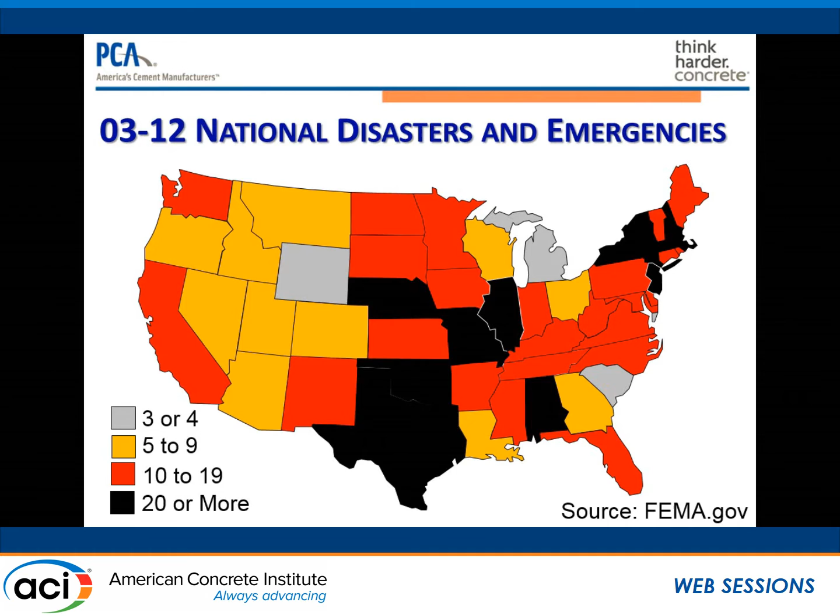No place in the United States is excluded from disasters. This is over a decade, and every state has had at least 3 nationally declared disasters or emergencies. This doesn't count the ones that the governor declares. These are the nationally declared ones. So there's a lot of disasters that occur. There's something that should be addressed better in virtually every part of the United States. And let's see what's going on here.

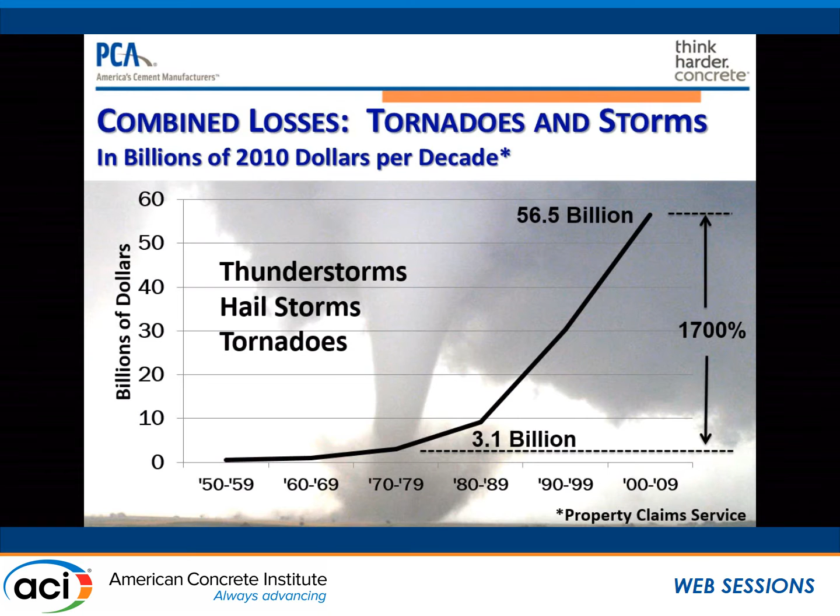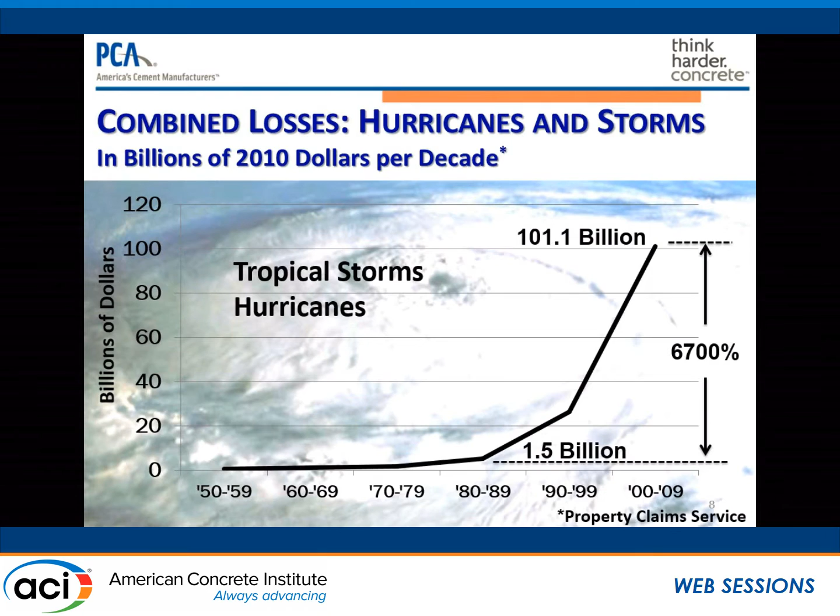Thunderstorms, straight-line winds, and tornadoes: from the 1970s to 2010, which is the last year I have full decade data for, a 1,700% increase in property losses. This is huge. Tropical storms and hurricanes, 6,700% increase in property losses. Something is clearly going awry. Winter weather events, an 1,800% increase in property losses.

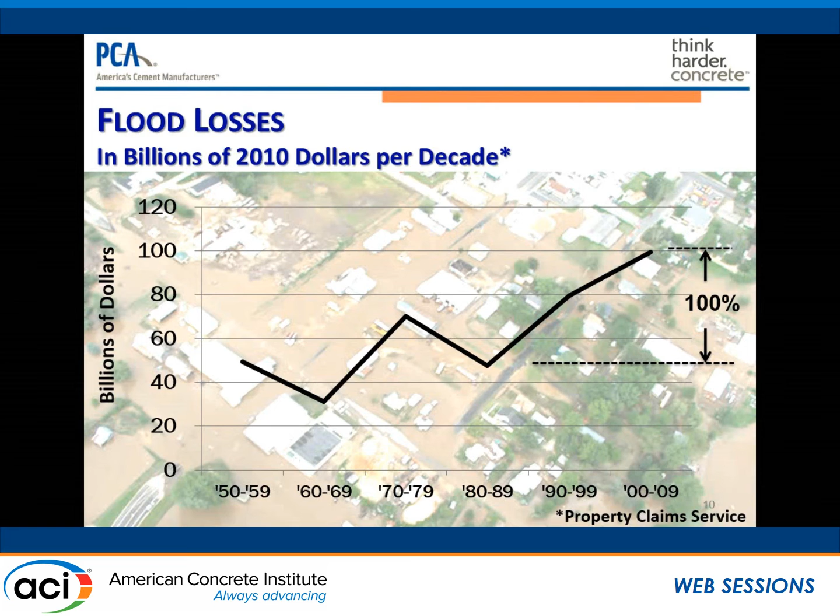Floods are not reported aggregately. The flood data comes from FEMA, where the other data comes from the Weather Service. So it's by event. But the amount of flood loss claims has increased by 100%. And these are all in 2010 dollars. So this isn't just because it cost less back then. It's all brought up to 2010 dollars. And in fire losses, an 85% increase per fire.

First thing people say, well, we're having more severe weather. There are worse events. Well, if you look at the statistics from the National Weather Service, the EF3 to EF5 tornadoes, they're not increasing. That's the number of EF3s and EF5s per decade, and these are the property losses due to tornadoes, straight-line winds, and thunderstorms. So something else might be awry.

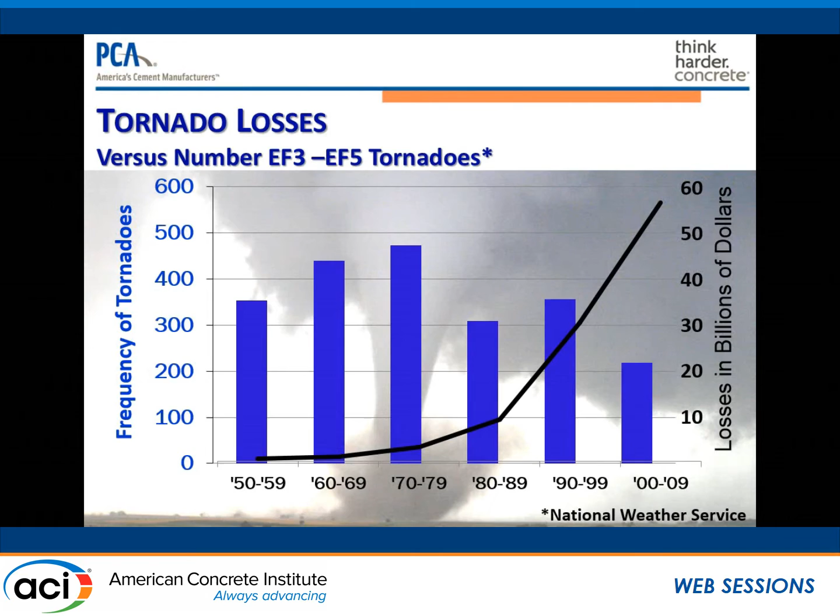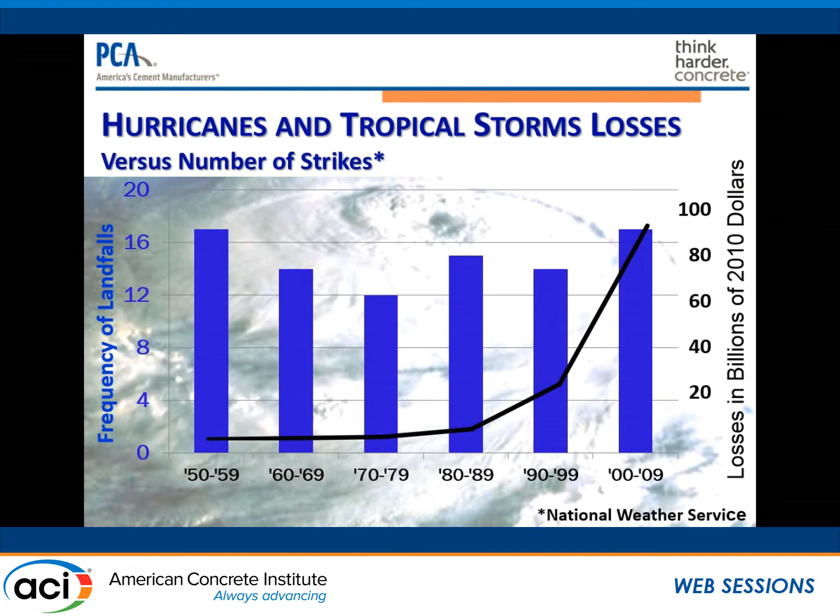Hurricanes and tropical storms making landfall. That's relatively flat. This is not. So it's not the frequency of events. Most people presume it is the frequency of events. Well, we're just getting more of them. No, we're not getting more of them.

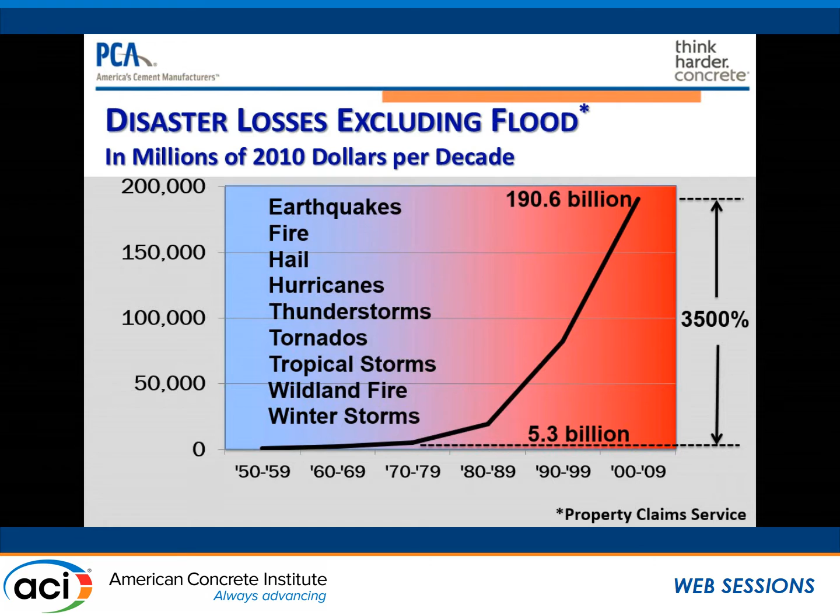When we combine them all, I don't have flood in here because, again, FEMA doesn't report the aggregate flood losses. But overall, it's a 3,500% increase for all disasters, going from the end of the 70s at $5.3 billion 2010 dollars to $190 billion 2010 dollars in 2010. This is all based on the historic data.

We do hear from NOAA and NASA. Their climate change models predict that there will be more severe weather. So if this is what's happening when we don't yet have the more severe weather, can you imagine where we're going to end up when we have more droughts and more wildland fires, we have sea level rises and more flooding, more storm surges reaching further inland, and we're not prepared.

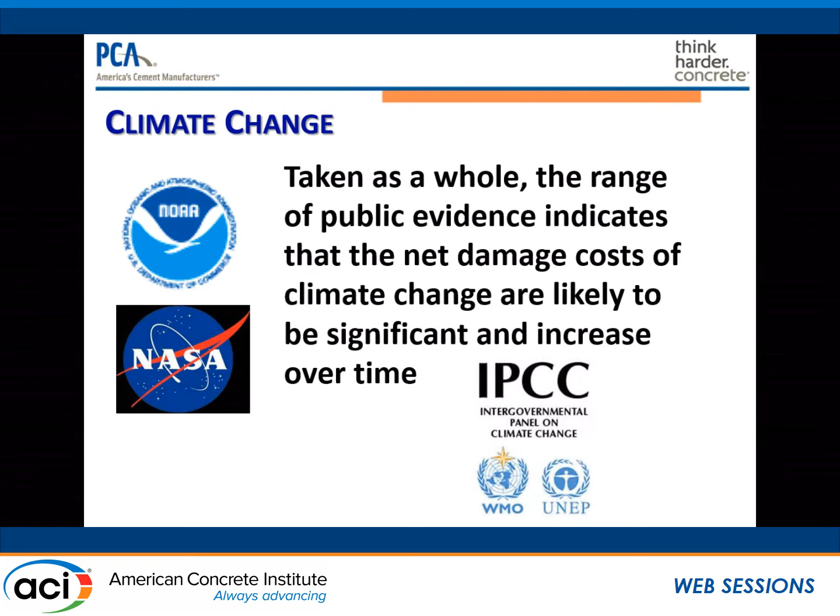Buildings are built for a 75 to 100-year life, and we're basing it on what used to happen. We're not even looking forward to what's going to happen with climate change when we're designing buildings.

This is from the February edition of National Geographic. They took a middle of the road. They didn't take the highest sea level projections. They didn't take the lowest sea level projections. They took a 5-foot sea level rise by 2100.

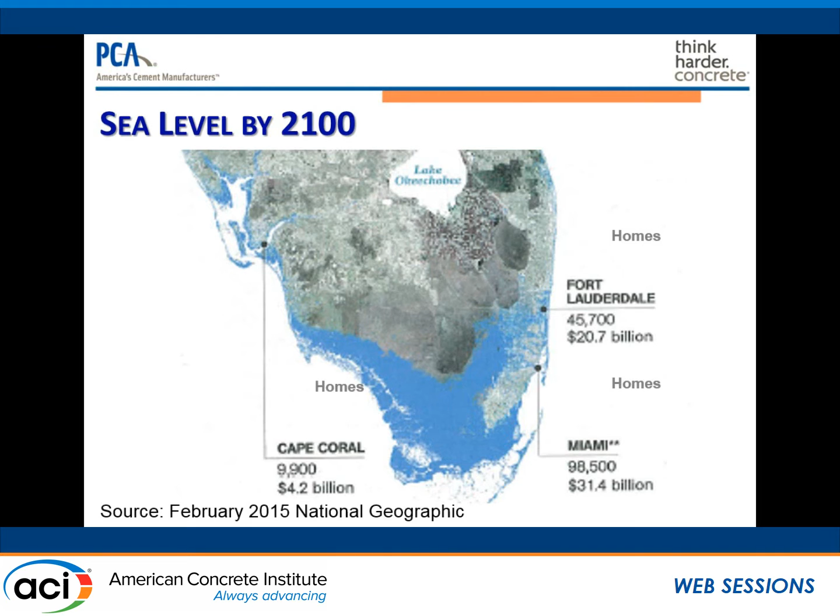This is Miami. Nearly 100,000 homes will be underwater. And we're still building the new homes in Miami today without anticipating that this is going to be a 5-foot increase in sea level. So we need to start thinking about doing things differently. So what is it that is potentially happening here that's causing these huge increases in property losses?

Well, the next thing I hear from everybody is it's demographics. It's the population shift. People are moving and living in more disaster-prone areas. Well, the Census Bureau data does not suggest that. It's an influencer. It has an impact. But clearly, these regional shifts in population aren't matching the slope of this curve of losses. So it's not population shift either.

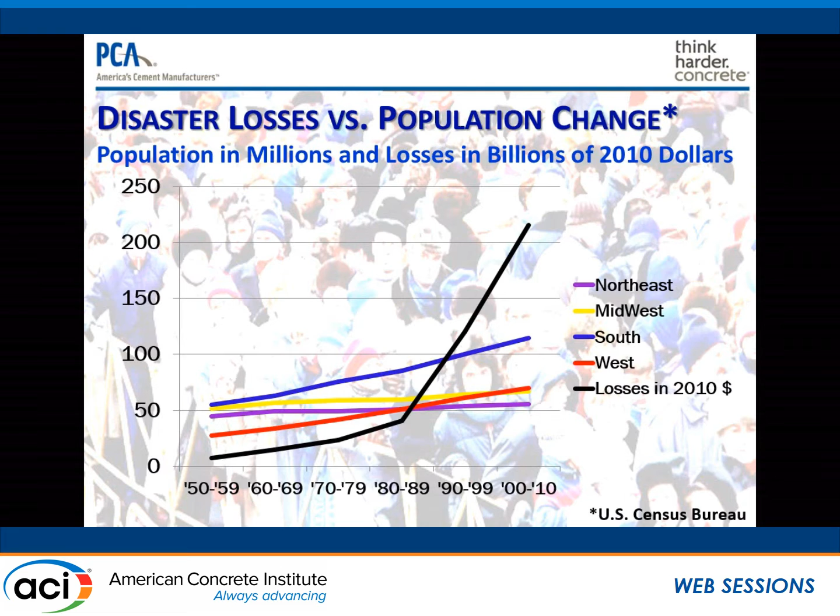And as places become more populated, property values go up. When property values go up, we replace those low-rise buildings with high-rise buildings. As soon as we get the high-rise buildings, they're built to a higher standard than the low-rise buildings. These types of structures typically will withstand any kind of storm surge or wind events that are going to happen. They might get some superficial damage to them depending on the cladding system selected, but for the most part, the mid and high-rise buildings perform very, very well.

So as the population moves to these areas, property values go up. You want to increase the population density. So as you increase the population density, you get high-rise buildings, and people are safer in the high-rise building. But all these people who are in these surrounding areas with these low-rise constructions are still vulnerable. So the population shift, even if it is a factor, is probably offset by what we do when people move to these more disaster-prone areas.

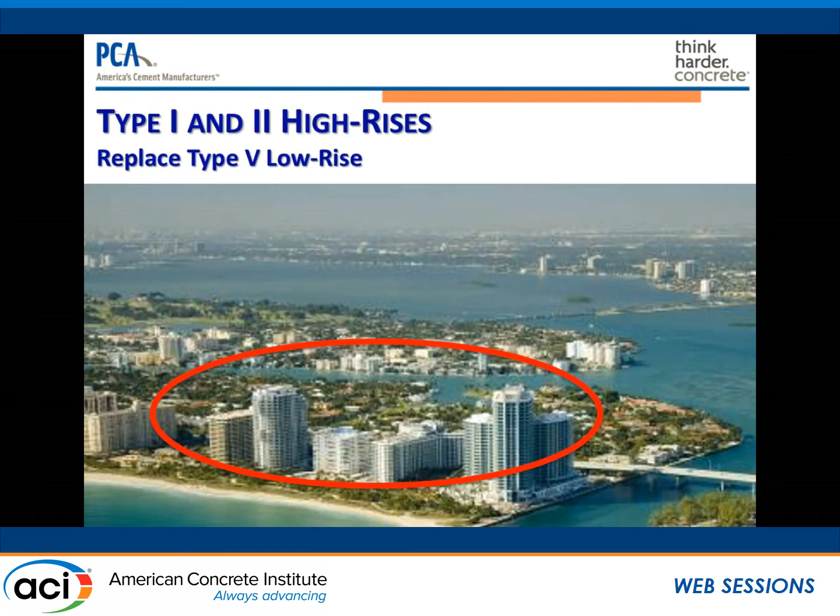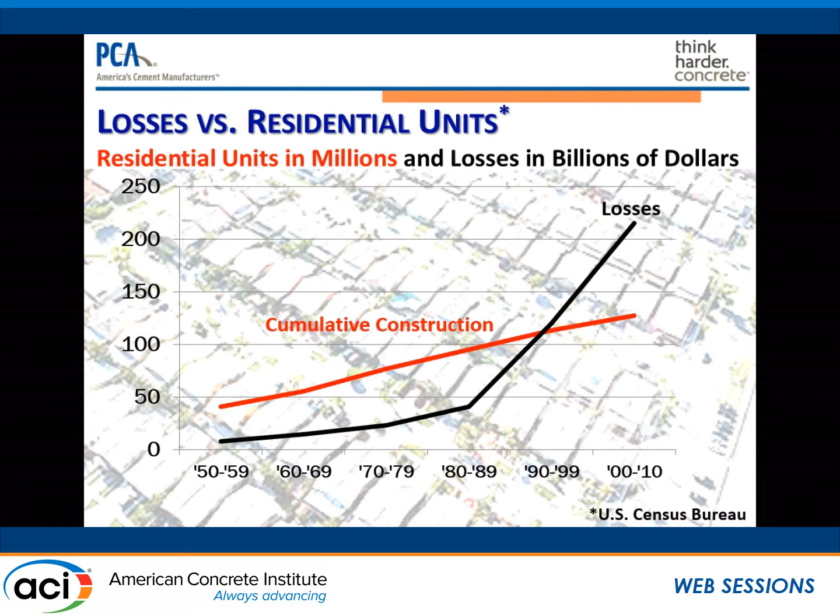It's clearly not the construction put in place. This is cumulative construction put in place for a number of residential units. It's pretty much a flat line from year to year. It's the same number of housing starts. But again, even when we looked at the cumulative number, it doesn't match the increases in property losses. So if it's not the frequency of events, it's not population redistribution, and it's not the amount of construction, that to me indicates that it's all tied to our societal trends.

In the 1960s is when the business model of least initial cost, maximum return on investment, started to become adopted as the business model for almost every corporation in the United States. There were several efforts to try to counter that. You might recall that we went through in the 1990s total quality management, and prior to that we had W. Edwards Deming and his work trying to increase value, but they weren't enough to stop this shift to drive everything to least initial cost. So what we have seen over time is changes in construction practice to meet this business model.

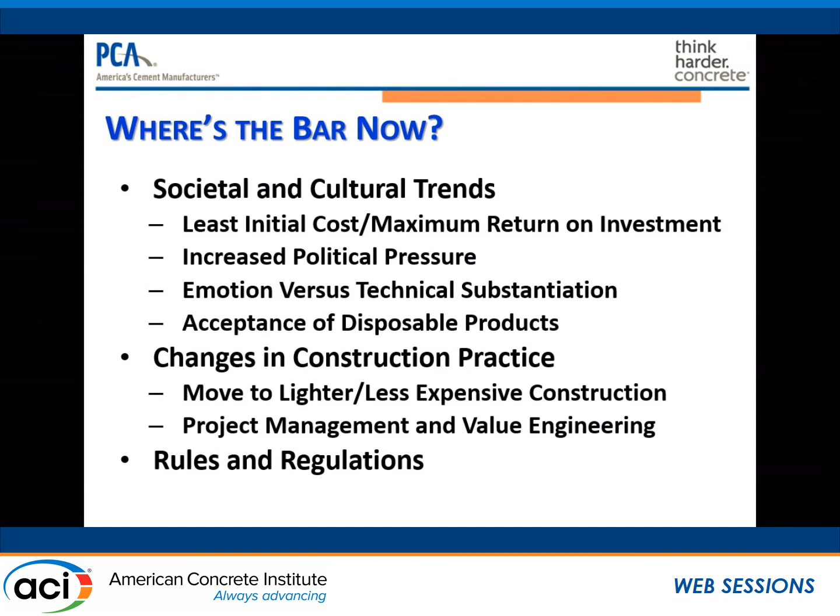This isn't about business people trying to do something intentionally wrong to increase the vulnerabilities of people, but it was just to stay alive in business. If you want to stay competitive, if everybody else is going least initial cost of investment, you need to follow that model to stay alive. You don't get a whole lot of options. This whole maximum return on investment, well documented by Dr. Michael Lepech from Stanford University, has really started to drive the increase in vulnerabilities.

One of the best ones to look at for residential construction is in the 1960s, you used structural plywood on the outside of a 2x4 wall. In the 1970s, oriented strand board demonstrated to be comparable to structural plywood, so it was also accepted into the code. Today, this is 3/16 of rigid foam insulation on the outside of the wall.

So for most homes that are built today, you have a 1/2 inch of gypsum wallboard on the inside, 2x4 studs with batt insulation in between, 3/16 inch of foam board on the outside, and then vinyl siding over the top of that. With a box cutter, you could probably go through the wall easier than breaking down the door. We are no longer building resilient homes.

There was a paper at the Structural Engineering Conference two years ago where in Missouri, there was a group of people who moved here from Florida, and they built their homes here in Missouri when they moved here, the same as they used to build them in Florida. Now, this goes back to plank construction, so that's what they were using when they got here, because they just knew that's just how you built homes.

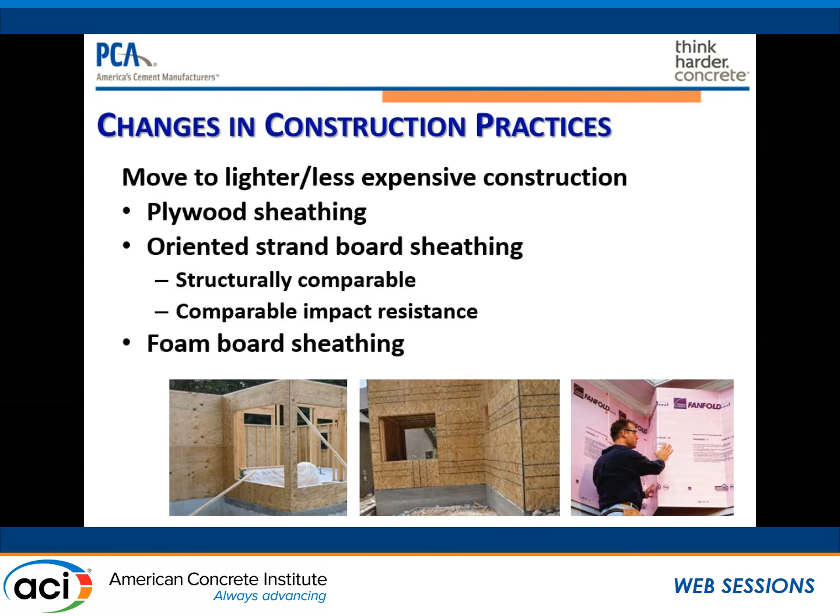They happened to come from a hurricane-prone area, and they used diagonal planking for walls and floors. And when the tornado hit their town, they didn't know how to do the attachments to the foundation for the tornadoes, but it just picked up all these homes and just moved them off their foundations. It just picked them up, put them back down. They were still intact.

There has been a dramatic change in the way things are being built. Part of this is because of government deregulation. This compounded the effort. Prior to the 1980s, most builders did not build to the local building code. They exceeded the building code because they didn't want to lose persons who could qualify for VA, HUD, Federal Housing Administration, Farmers Home Administration mortgage packages.

So they built to these HUD criteria, or the Farmers Home criteria, or some other government regulation. Well, these documents were designed so that the buildings would last for 30 years, or that was their intent, because they were insuring a 30-year mortgage on them. Well, in the 1980s, when we deregulated the federal government, these just simply disappeared. So it's left to the local building code. And in many jurisdictions, we don't even have a building code, at least a residential building code. So it created some more concerns.

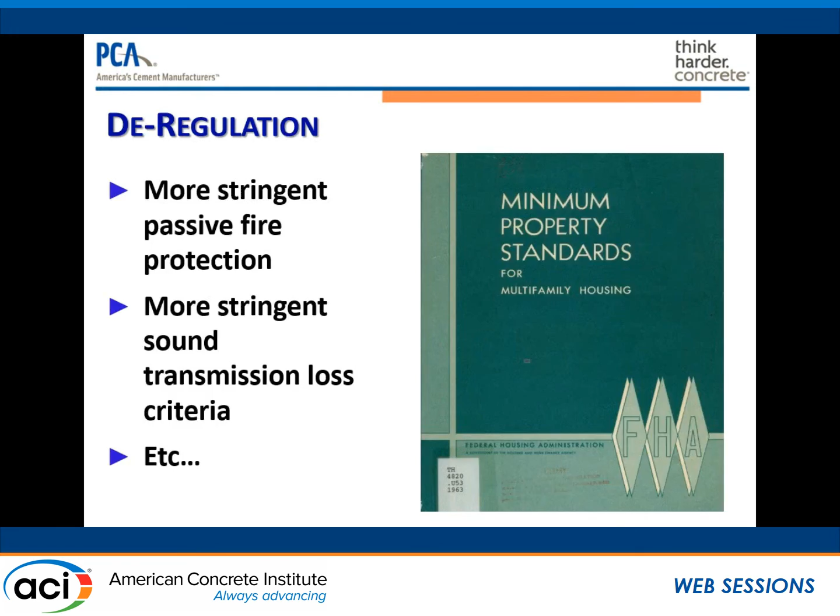How do you get to least initial cost of investment? You build to minimum code. So what are we providing? A safe structure? A structure that reduces vulnerabilities? I don't think so. Minimum code doesn't imply anything about property protection. Minimum code is the worst building that can be legally permitted to be occupied. Things are spiraling sort of out of control. So what can we do?

Well, this has become a major issue for communities. Communities are trying to figure out how to become more resilient. They know Moore, Oklahoma can't continue to take these tornado hits. Coastal Florida can't continue to try to rebuild after these hurricanes come in and leave scoured slabs behind. What is happening? This has really been elevated.

It's a national priority. There's presidential policy directives, there's presidential executive orders. There's an effort by the National Institute of Standards and Technology to set up a national framework for resiliency, and a significant component of that will be building codes and standards. FEMA has launched Resilience Star as a pilot program. So this is getting awareness. This is increasing in awareness.

I participated in a program to educate staffers working on a bill for enhanced resiliency on December 2nd. I had to yield my time slot to Congressman Daniel Webster, because when the congressman shows up to talk to the staffers, everybody else just goes and sits down. And his comment was, buildings should not fall down after a hurricane or any other disaster. Cool. They then invited me up to talk, and I just said what he said. I mean, this is what we should be doing.

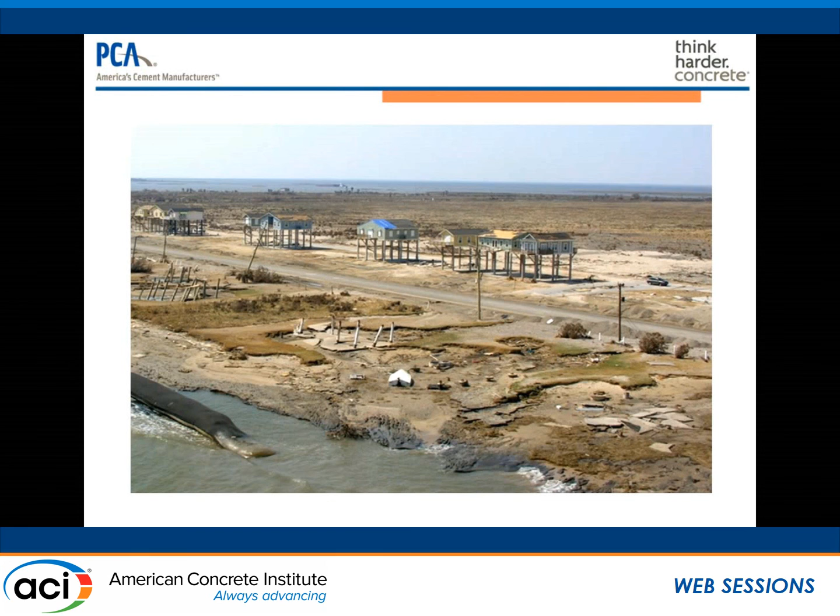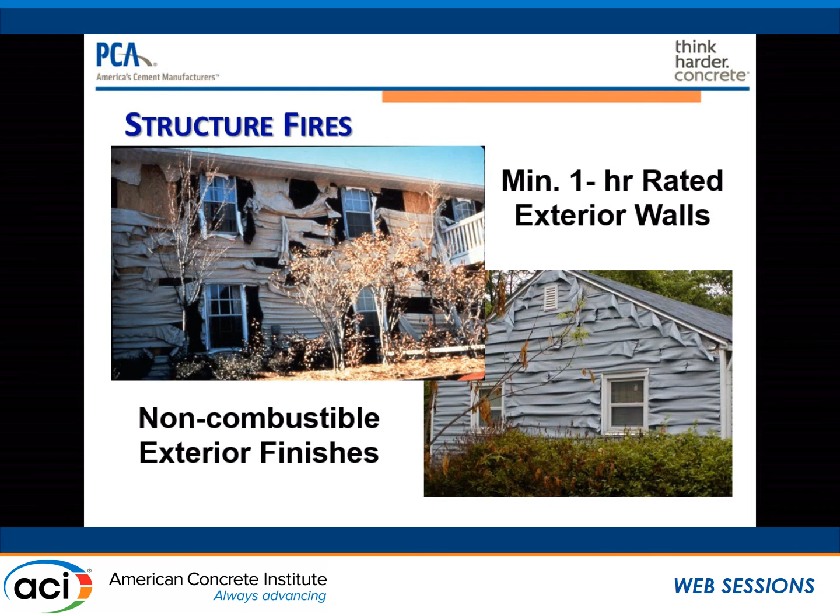We should get this right because our society can't continue to support the aftermath of these events. Adding to the code modifications, 1 hour fire rated walls instead of this. This wasn't the building that had the fire. This is 150 feet away from the building that had the fire. This is just from low E glass on the neighbor's building, melting the vinyl on the other side.

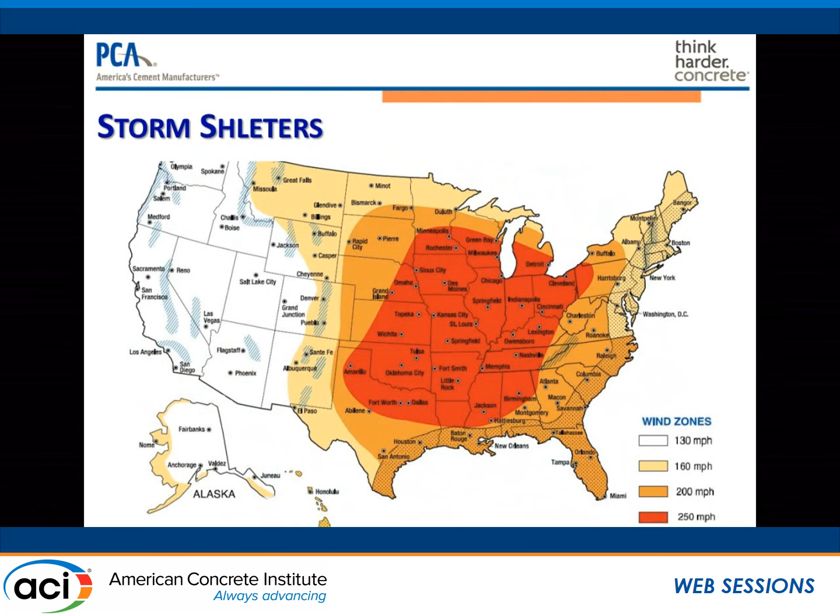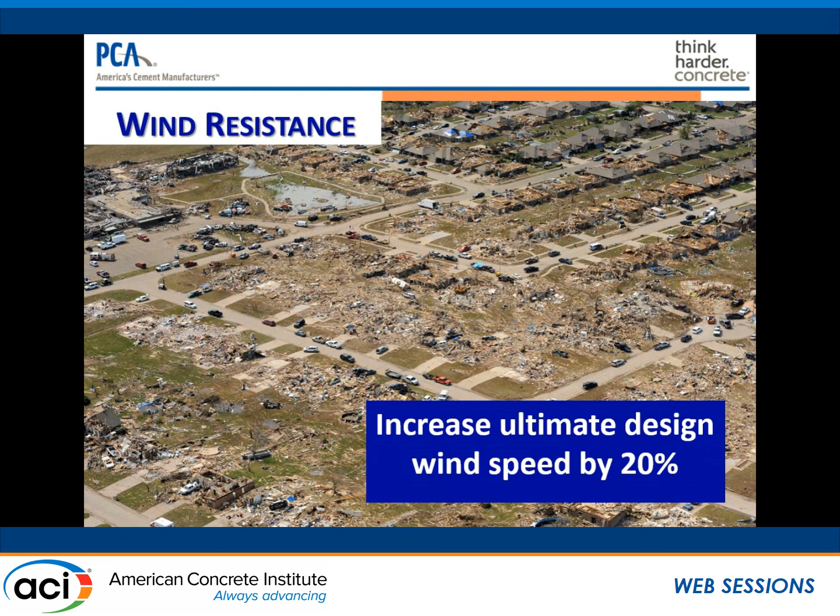Wildland interface code already exists. Very few jurisdictions adopt it. Tornado shelters are easily incorporated into residential homes. Very few jurisdictions require them. Very few jurisdictions require any part of the structure to be resistant to missile impacts. We suggest increasing wind speed by 20%. Elevate construction above base flood elevation with at least a 3-foot freeboard. Avoid exterior sidings that are susceptible to hail impact as well as roofs.

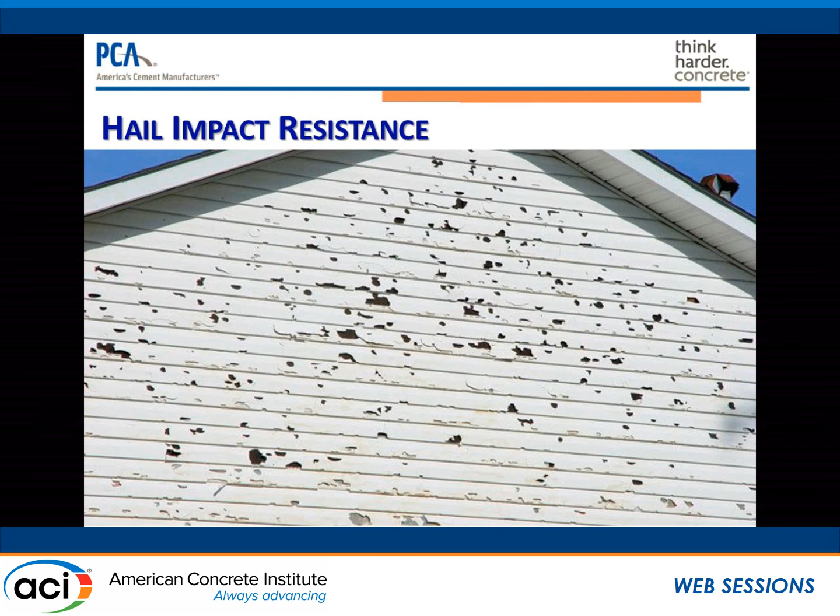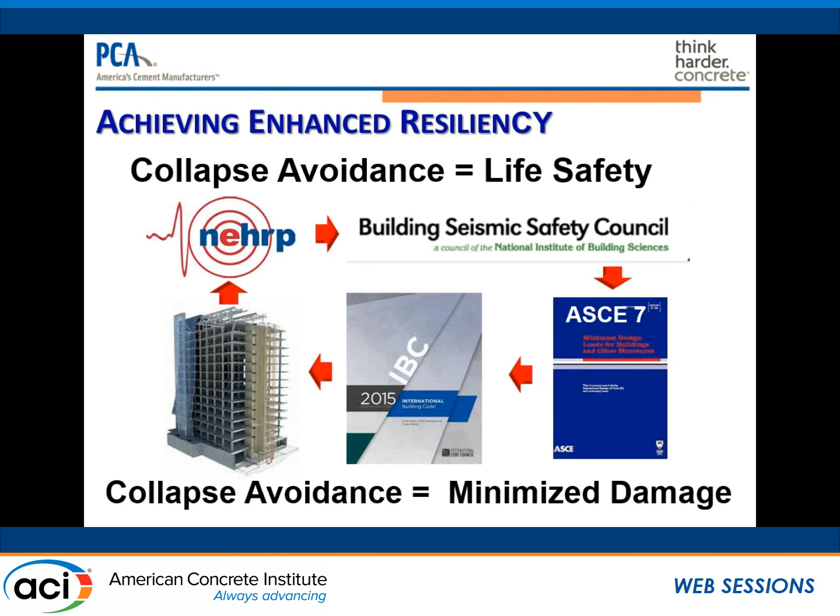And we need to change the way government is handling these issues. Voluntary programs aren't going to work because most of us don't get to benefit from voluntary programs. Strongly encourage anything you can do to try to get this shift, like the NEHRP initiative. Collapse avoidance for earthquakes is synonymous with life safety. For all other disasters, we just say, get out. You'll return to a scoured slab, you'll return to nothing, but you didn't lose your life because you weren't there for the event. Now, I'm not suggesting that people should not evacuate when the event's coming, no matter how well their building is built, but we could do better if we treated other disasters like we did earthquakes.

And I think people are finally starting to get it. When a cartoonist puts something in the paper, that tells me that it's starting to resonate amongst other individuals. So I think people are starting to get it. I think it's a huge opportunity for the concrete industry. So thank you.